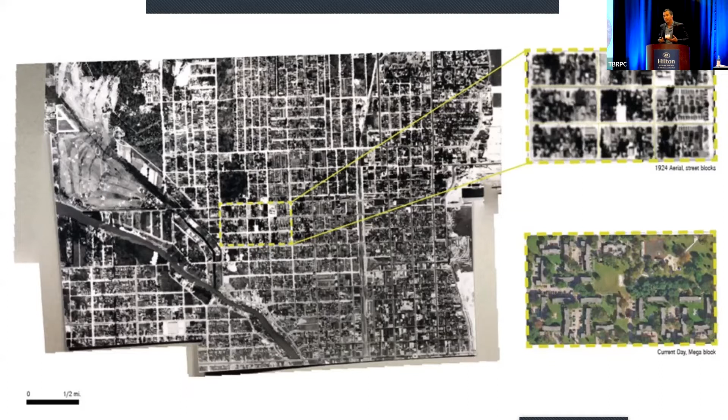And so this study, while it's complex, was a part of a study with the city of Miami who commissioned our firm to study 200 miles of roadbed to adapt to climate change and sea level rise before the next mortgage cycle, to buy time before the longer decisions on managed retreat need to happen.

That's really important because these are properties that are not in the floodplain and they're not aware that occasionally water concentrates. And it's about topographic shape. If you have a bowl that's elevated and you have affordable housing in that bowl, all the normal maps will overlook that. But we run this script, and it tells us a few things.

It tells us where there's vulnerability upstream from pluvial rain. Now, pluvial models will tell you about accumulation, but we want to look upstream from that and look where that water is coming from. That also is the biggest opportunity, which is green infrastructure that is networked, meaning you want to hold that water uphill before it gets into the floodplain.

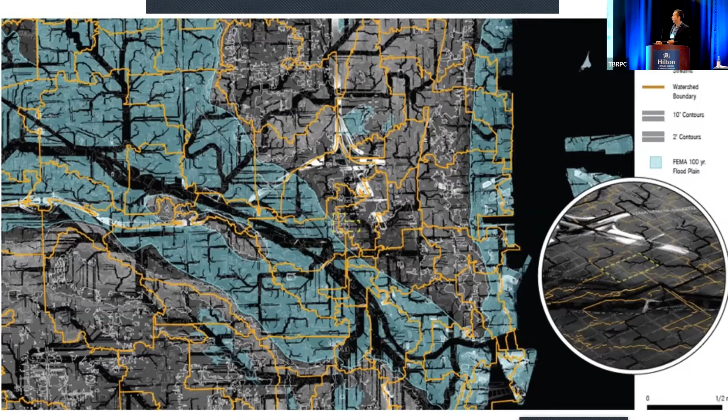Circulation, primary and secondary circulation flows. And then finally, the greenway, the big connectivity. And for us, we took the dendritic pattern of water and trees as a form maker to the paving system and to knit that community together. And understanding the habitats from uphill to downhill and understanding what is hydric versus xeric and what is appropriate.

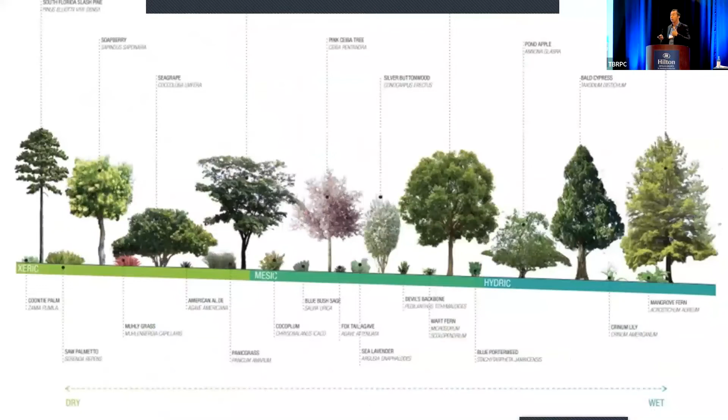Also integrating public art as wayfinding and communicating climate issues, right? One of the important issues with this climate work that planners are doing is not to forget art, and to please collaborate with your local curators and museums, because art becomes a form of climate communication.

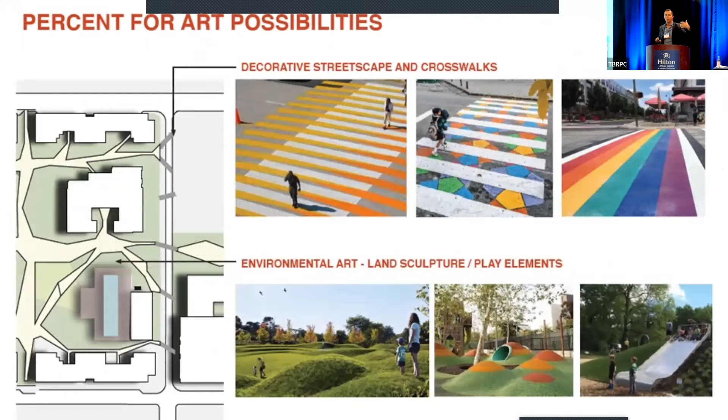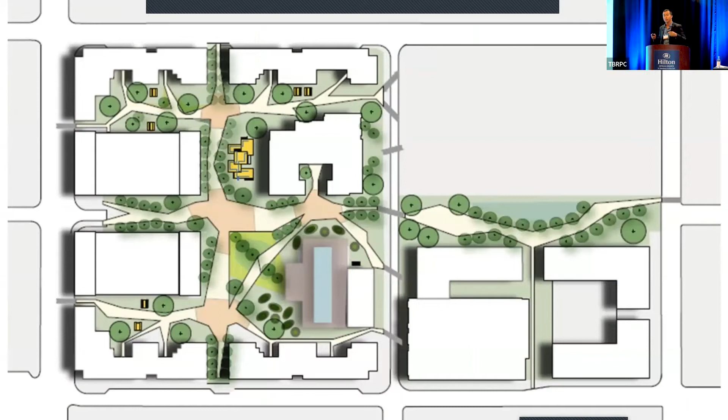And this is a detail of the first phase, which is going to start construction soon. We just went through permitting. And you can see that dendritic pattern. And we have a woonerf, a living street, being built. The living street leverages that phenomenon that I mentioned where groundwater can be lowered by trees. And in this case, it's a road that zigzags because we want to slow those cars down.

So a woonerf is a European idea of a living street, like a living room that people can use. But this is meant to emphasize human use, this cross grain, and de-emphasize the car, right? And so you can do this in a slow moving street. And a living street is unique in that the whole subgrade is completely structural soil, and the porous surface allows water to infiltrate the root zone.

What does that do? That allows the tree roots to interconnect under the roadbed. So the roadbed is a living system. The structural soil allows the trucks, fire trucks and service trucks, to not compact the soil or the roots because there's void in there. And the roads will last 30 years, whereas in a normal floodplain, roads are lasting between 4 and 8 years because they're failing.

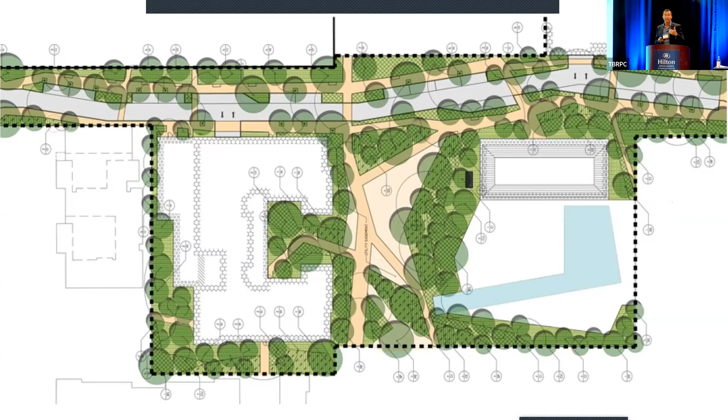A living street looks like this. This is one in Wynwood in Miami that we've designed. It's a deep excavation with structural soil brought in and allows tree roots to interconnect in low-lying areas. It's called a blue street, one of the many living streets. But a green street is slightly different. It's when it's uphill and you want to hold that water. It's called a bioretention system, where that excavation is lined in a liner and the tree roots are sitting in essentially a cistern. And so you use hydric species like cypress, which like their feet wet.

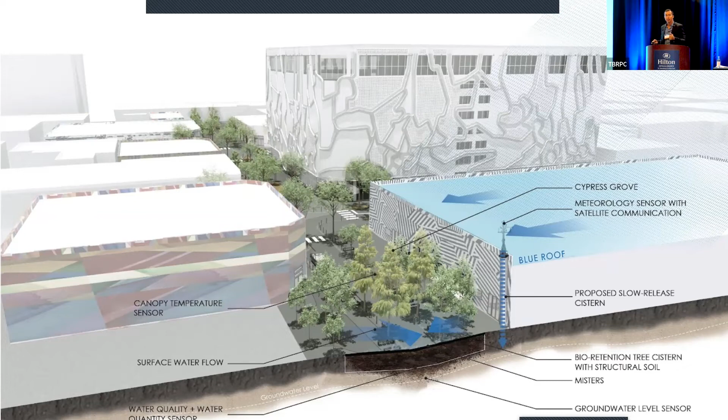But on Miracle Mile, the New Yorker magazine and New York Times documented that the small businesses on Miracle Mile were able to open the next business day. And this was not the case with the Miracle Mile before. It used to flood every summer afternoon. So this was because of the deep excavation from right-of-way to right-of-way with the structural soil and porous paving system. We designed it for a 1,000-year rain event, a Hurricane Harvey type Texas storm. We modeled it over to Coral Gables. There's a $27 million investment for the Miracle Mile.

There's ways to make this more affordable using porous asphalt. In this case, we use stone. But the most important detail, there's a stormwater utility at a catastrophic scale. It's only living infrastructure that is performing at the level of climate change. To take your hard infrastructure standards, which are 5 and 10-year storms, and get them to operate at a 1,000-year event is a very expensive investment. The pumps and pipes are just so big, right?

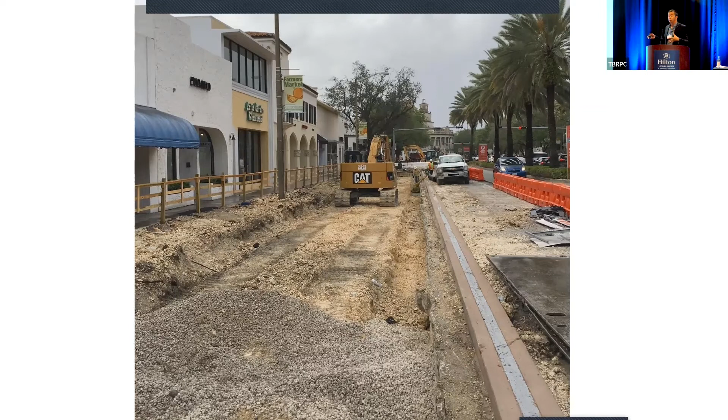But when you decentralize it, you are now spending money at the surface instead of underground. Instead of spending millions underground on a pipe, you're spending it on the surface, and you can make it more beautiful. You can afford to have climate artists, such as we have a climate artist that installs every 3 months on the project. And we work with curators to find the best climate artists in the nation to communicate this ephemeral wind condition.

And furthermore, on Giralda Plaza, in the evening, it might open up and let service trucks come in, but you come back a few hours later and people are eating on the plaza. So it's a former street converted in downtown Gables. But the entire roadbed from right-of-way to right-of-way is one big living system. It's a deep excavation 3 feet down that allows those roots to touch the groundwater and lower the groundwater and increase capacity for normal rain events in the future.

So in low-lying streets here in Southwest Florida, if you have an area where it's contentious because it floods at king tide and residents don't necessarily want to elevate roads, you can buy time by creating capacity by lowering groundwater and managing it. And you can also elevate, because when it's porous, you're not discharging into the private properties, you're managing on site. So it solves a lot of problems.

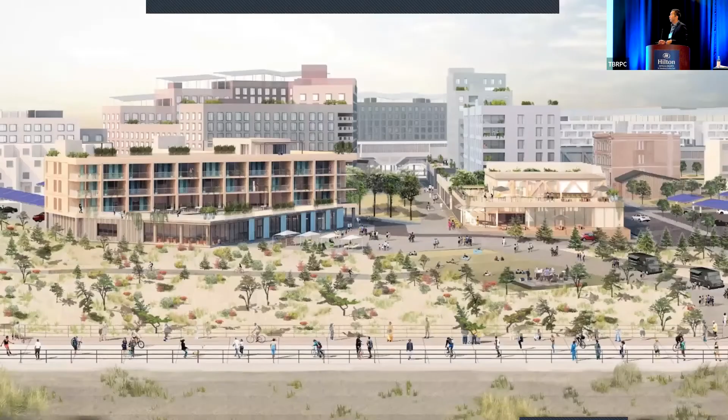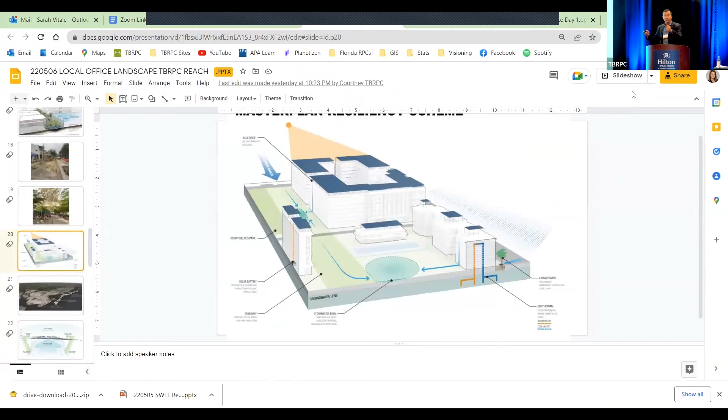Back on downtown Miami. So this is a multi-layered resiliency strategy. There were not any exceptional subsidies for this project. The goal was to determine what were the low-hanging fruit on energy resiliency through solar storage, and what were the low-hanging fruit on water resiliency. How can stormwater infrastructure at the scale of a city block be designed so there's multiple layers of payback instead of a single pipe? So by working with a civil engineer who supported our strategies and came along with us with his formulas, we're able to reduce a lot of that pipe infrastructure.

And on affordable housing projects in a large P3 like this, your upfront infrastructure and land costs, positioning costs are very high. And so if we can reduce that through these resiliency strategies, to prove scientifically that we can manage that water without the pipes by using this living infrastructure approach, we can save a lot of money up front on every land project, whether it's in a downtown or at the edge of the city.

In the case with solar storage, Miami-Dade required a 96-hour backup power for affordable housing. That then opened up a conversation for a backup power solar storage system. Why? Because if you have a normal generator for a site this big, it's like owning a horse. You have to feed it all the time. You have to have a maintenance person come, start it every couple of weeks, once a month. You've got to make sure you have 96 hours of fossil fuel at all times. And when hurricanes come, it's hard to get fossil fuel for anyone, right? And so the whole system breaks down.

Solar storage is quite the opposite. It pays its own way, and it pays its own way in two ways. It's a 30-year life in the solar system, but by around year 10 to 12 in Florida, it's already paid its way for the energy side. On the battery side, it takes about 15 to 20 years for that to be paid off because it's avoiding your peak charges on your bill. Now, the challenge will be for the developer to monetize that energy savings in the project. So it's a lease deal conversation.

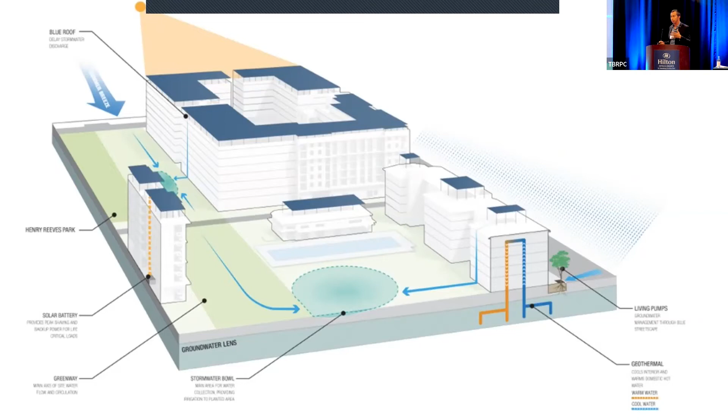So with a few more minutes left, I'm going to jump to New York. So how do you build an affordable housing project that is net zero? Well, we had to work with Goldman Sachs, the banker, and a consortium of developers who are teamed with New York City's HPD, Housing Preservation and Development.

And this is Rockaway Beach. It's the equivalent of Anna Maria Island to New York City. You have the city here, Manhattan, which is like Tampa, St. Pete. Then you come out to the beaches, and this would be like Indian Rocks Beach, right? It's like the strip of sand out there, 2 blocks wide, 11 miles long.

It's the most vulnerable part of New York City because it's low, it's exposed to hurricanes and the coast. And it also has similar issues of groundwater, which rises up, and freshwater floats on top of salt. So it's more vulnerable in your inland areas where it's low lying and not exactly on the beach. So behind the beach block is where your most frequent flooding is.

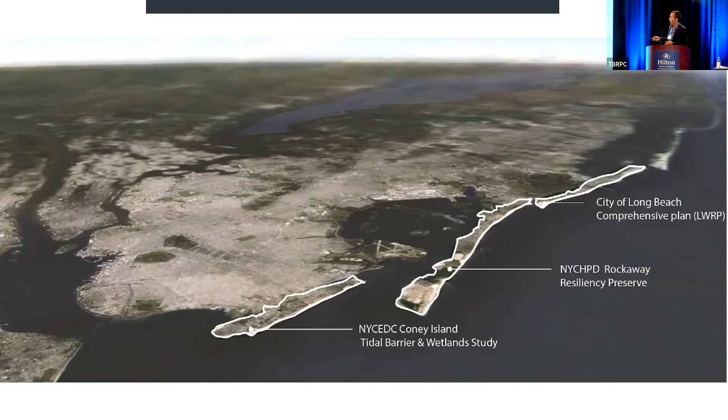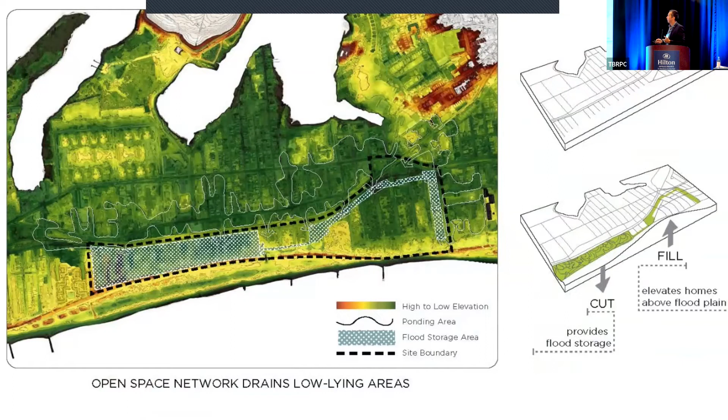And so how do we design this whole project to both improve the drainage for the neighborhood around us, but also create a neighborhood hub of normalcy when there's a storm or any other disturbance? We also designed the open space as a dune preserve. It was already flat land. It used to be housing. It was cleared by the planner, Robert Moses, in urban renewal. We're bringing back the housing, but now we're also bringing back that topography, which is biodiverse.

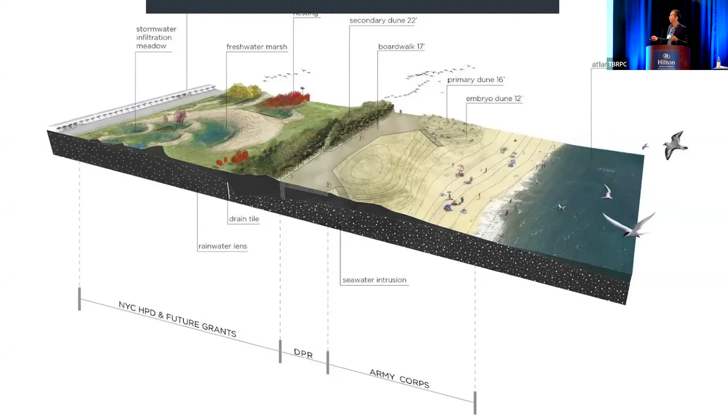So we're fighting extinction with this project, and we're reintroducing extirpated species that are locally extinct, such as salamanders and tortoises, into the city using these wetlands. But the wetlands are also absorbing the runoff from the neighborhood. This is what that project looks like. Half of it is a nature preserve designed as a massive sponge, and then a series of urban agriculture

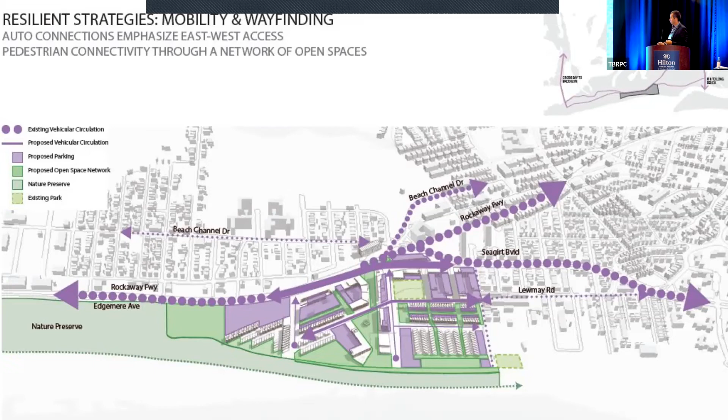happening in linear walkways. So a child can get around town on his bike and not have to deal with automobiles. There's an equal amount of corridors for people as there are for cars, micro mobility stations, and the high density is around the A train subway. So you can get on this station, the door closes with an ocean view, and it'll open in Times Square. So this is the A train subway station. And so you'll see we have high density near the transit plaza that we're currently designing.

We have a Miracle Mile type street, living road down the center that will connect to the boardwalk. We also went through a massive planning process to introduce a manufacturing zone on the beach, because beach towns have a seasonal economy. We're going to chop those peaks with the manufacturing. So that allowed us to bring a brewery on the beach, and the brewery is an incubator for food as well.

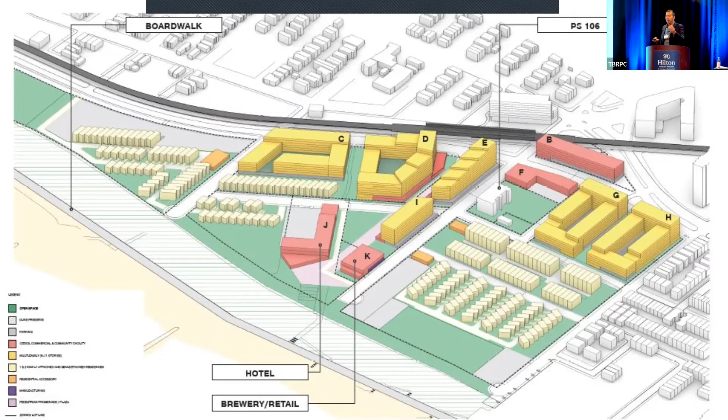This is a 67% BIPOC community. We wanted to make sure that a lot of these Black-owned businesses have subsidized rent on the strip, because after COVID, there was a lot of food being made at homes and being sold in the community. A lot of incredible talent in food art. We want to bring them out and get them a restaurant to grow those businesses that popped up after COVID at home.

And this is what that community looks like. We have a mix of 100% affordable buildings. We have a mix of semi-affordable, and then we have market rate bungalows and townhouses. We also created a micro unit bungalow. It's a small 400 square foot bungalow that's a starter home in New York City.

This is important because if you're a fireman or a teacher in New York, you can't afford a home. It's $1 million for a starter home in New York. We want to create something that's a sub-$1 million starter home where you can grow a garden, grow your own food, and have no power bills because you get your power from the sun, which charges your Tesla and you can drive around for free, right?

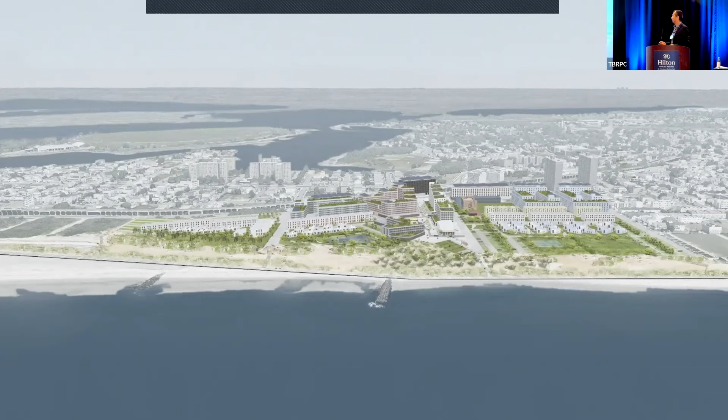And this is happening. This is not the dream. We're showing you how to incrementally get there. Before we did this net zero neighborhood, we designed a series of buildings with Goldman Sachs and L&M Development. The principal is Ron Moelis from L&M Development, called Beach Green. They're just across the street, and they're single buildings that built up to net zero. And the goal was to have Goldman Sachs and the developers take incremental risks with buildings.

And the first building, phase 1 of Beach Green, was documented in the New York Times. You can look up Beach Green, New York Times, and they cover this. That Beach Green 1, we got half the energy from the site from solar. Beach Green 2, we added geothermal cooling and heating from the site, which is using groundwater to heat and cool the building instead of air. That got us to 75 to 80% of the energy from the site.

Now, Beach Green 3, which is currently going into construction, is going to be the first net positive energy carbon neutral building in the country that's 8 stories, 100% affordable, with ground floor cafe that is helping to fight the food desert of this part of the city.

But the water resiliency aspects are multi-layered. For every square foot of building, we're handling a quart of water. And that's an important metric. And I hope that South Florida will start to implement zoning laws, 1 quart per foot. Any new projects moving forward, 1 quart per foot. Hold that water and reuse it on site. Why? Because trees love rainwater.

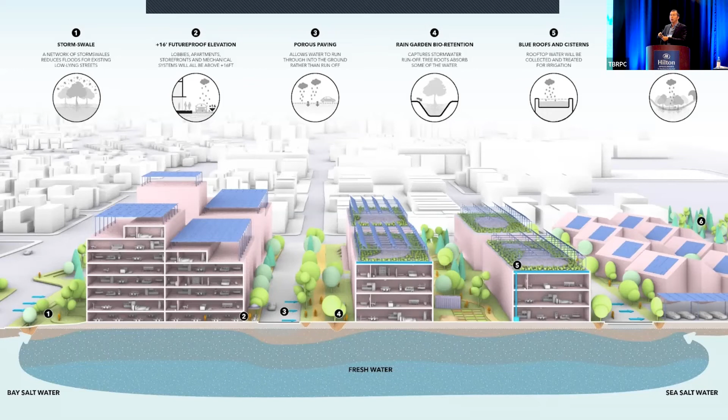They hate city water. City water has chlorine, it has bacteria, bacteria killing chlorine, and the water's pH alkaline. Trees want acidic to neutral rainwater that's sweet with no chlorine, and they will explode into the air without any fertilizer. You don't need fertilizer if you use rainwater. It's really amazing. And so, this is really an integrated city between the geohydrology and the sky. Really, the buildings are a continuous network that helps manage water from cloud to ground.

On the energy side, we're leveraging the groundwater for geothermal heating and cooling. You can do this in Tampa. Southwest Florida has had geothermal back in the 70s, and it's so efficient now. I'm surprised that people don't do it. It's just a knowledge transfer issue.

Solar, people think that if you put solar on the roof, I can't have a green roof. Not true. Green roofs are happier with something called agrovoltaics. So the difference between a regular solar panel like this, which is a canopy, you can do this on a parking lot or you can put it on a roof. The difference between a normal solar system like that versus agrovoltaics is that, in the case for New York, you optimize for winter, which means a steeper solar panel, which means they're more spaced out so that in the summer growing season, there's more sun going down.

If you know anything about plants, if anybody gardens, plants love morning sun and afternoon sun, and they all wilt midday because it's too hot and they're putting out all their water, right? If you eliminate that midday sun, you can grow food on the roof and produce energy. So this is energy justice and food justice all happening in one neighborhood.

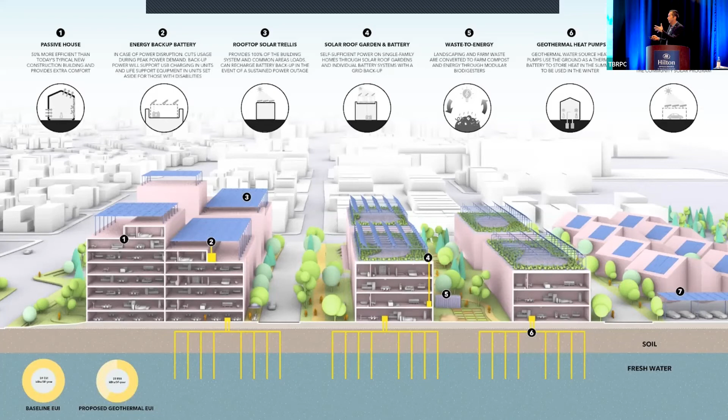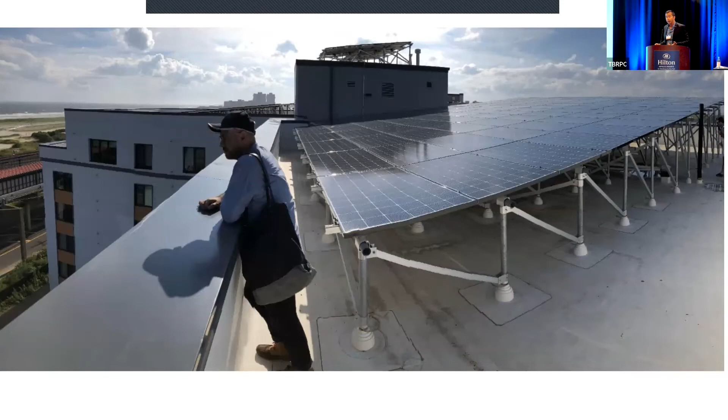This is what that Beach Green project looks like. It's built, you can go visit it. I give tours to Rosie Perez, the actress. She insisted I take her here and we give a tour. This is the Dean of Pratt Institute, the Associate Dean, but this is a solar roof. It has a solar parking lot. It's completely porous, living asphalt, right? All the water's managed with living plants. There's no pipes. Food is grown on site in this project.

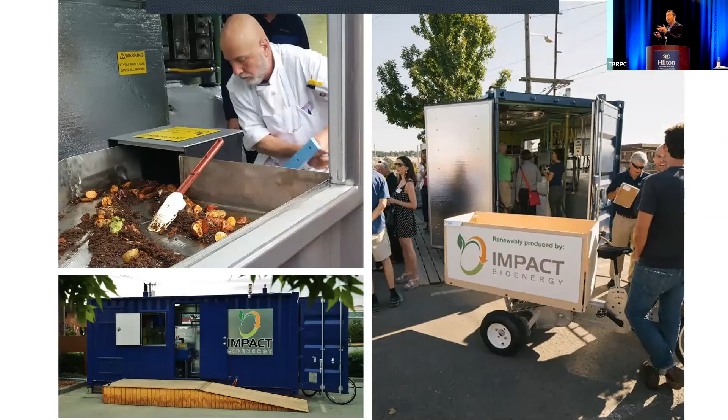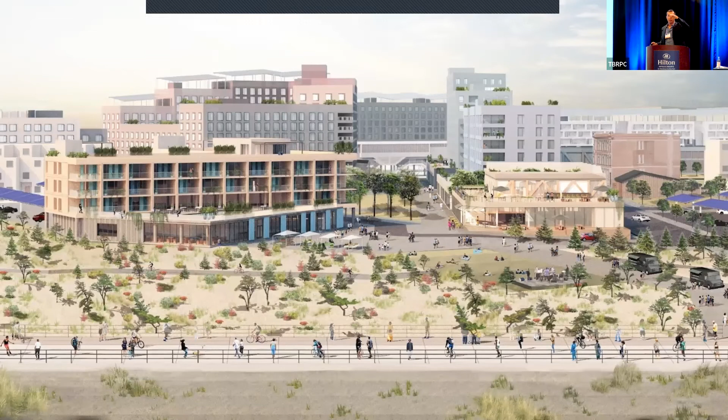And the waste from the restaurants comes back to the community gardens. Community gardens take that waste and they have an anaerobic digester, which you saw there, which creates electricity and compost. And so this is what circularity looks like. We close the economic loop and the food loop. This is circularity in action. And this is what this project Main Street looks like. This is timber buildings, which will be carbon neutral, all solarized. And this is the future.

And there's a famous quote from the futurist William Gibson, which says, the future is here, it's just not well distributed. And so I hope here we can work on that.

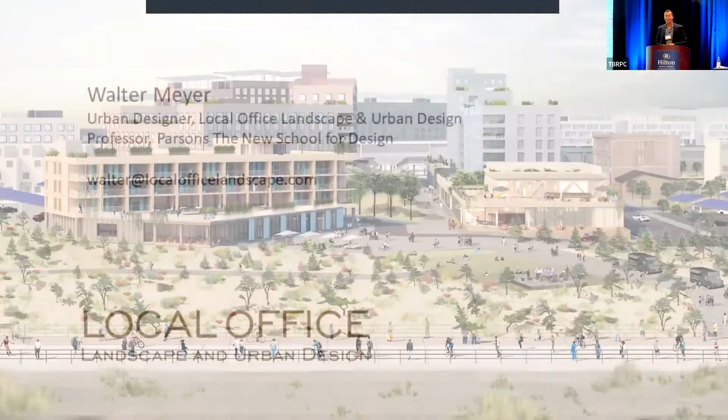I've worked with 3 White House administrations on resiliency, mostly on interagency transfer of knowledge. So between city, county, and feds, aligning grant streams and shaping grant streams so that we can build resiliency in efficient ways. But we also are focused on the marketplace, that if the private dollar and the public dollar all pull in the same direction, we can leapfrog to resiliency, not at the building scale, but at the neighborhood scale. Once you're working at the neighborhood scale, you now have a large footprint that you can start to build resiliency in a region and eventually as a nation.

Question on the left.

Yeah, thank you so much for a very exciting and interesting talk. And I'm basically ready to get in a car and move to Rockaway Beach. So I'm a physician, I'm not a developer. I'm in the room because as a physician, I'm very concerned about the way our built environment affects human health. And then I think the downstream or lateral effects of that on our economy, of having an unhealthy human population. And that's an enormous burden.